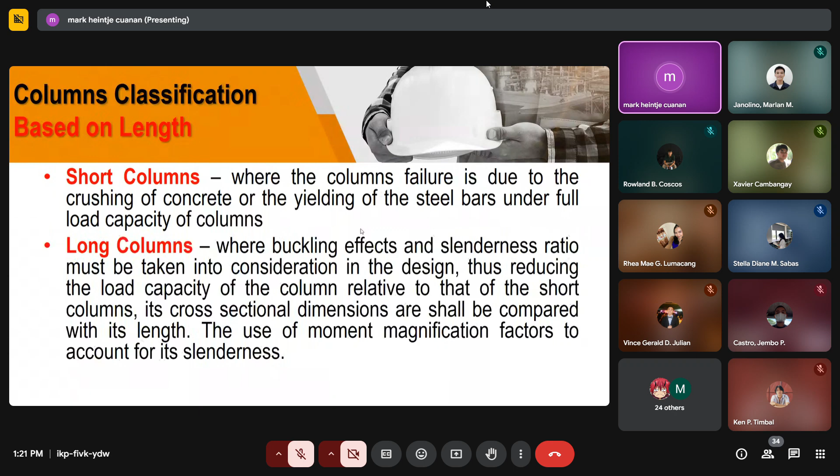We can also classify the column in terms of the load, depending on the arrangement of our axial load. When the axial load is at the center of gravity, we call it an axially loaded column. Or if it is within a specific eccentricity, but that eccentricity is very small, about 15 plus 0.03 of h, where h is the dimension of our column where the eccentricity is, then we can still call it an axially loaded column.

So in this case, if the eccentricity is very small, then we can neglect this eccentricity and only consider the actual load that the column is carrying.

And if there is a significant value of eccentricity, but the eccentricity is within a single axis only, just like this figure here, wherein EY represents the eccentricity, and E sub Y is actually greater than 15 plus 0.03 of H, since the eccentricity is only at a single axis, then we can call it an eccentrically loaded column.

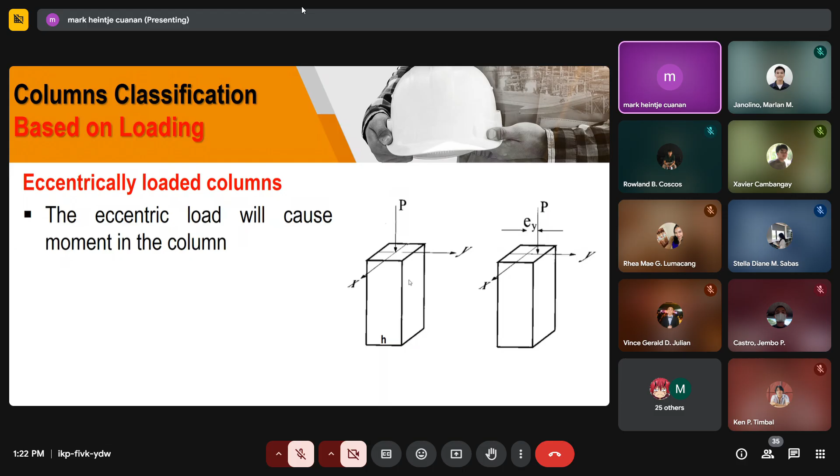And when the eccentricity is within two axes, just like this figure, if you notice the load P here is eccentric along the x and y axis, then that particular column is a biaxially loaded column.

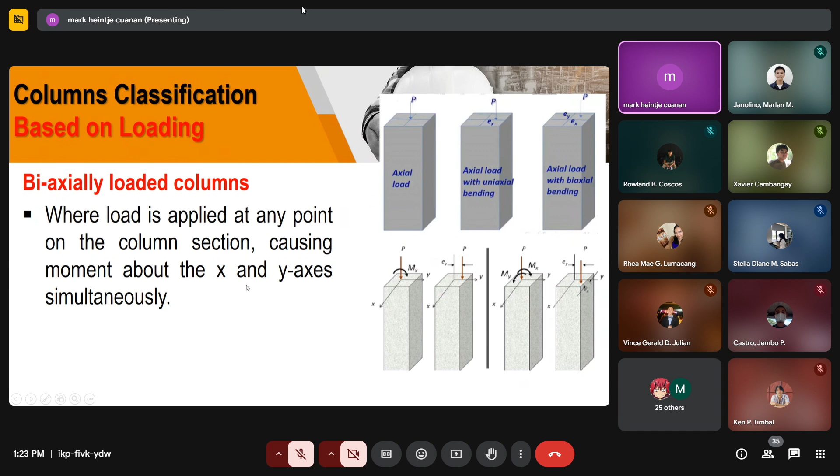We can also classify the column in terms of the frame configuration. If it is braced against side sway, meaning it is without side sway, then we can neglect the slenderness effect.

If the slenderness ratio, this value KL over R, is equal to or less than 34 minus 12 times the ratio of M1 and M2, and also less than or equal to 40, where M1 and M2 are the end moments of the column.

These are the moments that the column is actually carrying, wherein the ratio M1 over M2 becomes positive if it is in a single curvature, and negative if it is in a dual curvature.

You can say the curvature is single if the direction of the end moments are in opposite sides.

While it is negative if the direction is of the same, if the moments are of the same direction.

Take note also that in terms of the slenderness ratio KL over R, K is the effective length factor. The L here is the unsupported length of the compression member, sometimes denoted as L sub U, or unsupported length. And R here is the radius of gyration, equal to the square root of the moment of inertia I divided by the area.

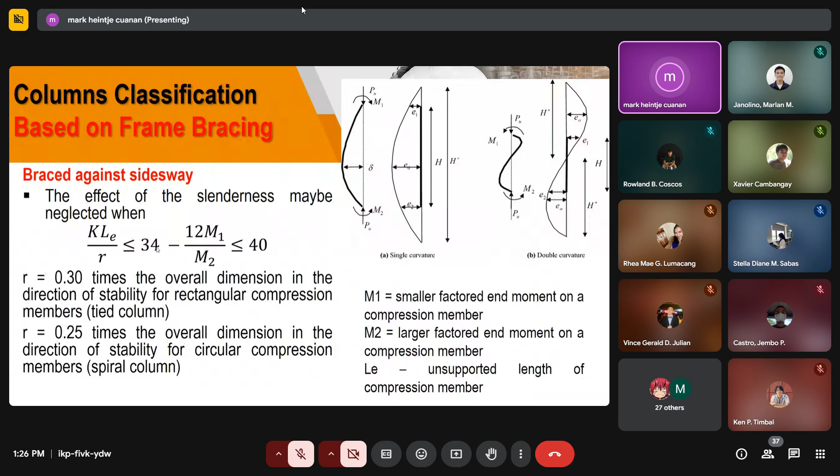Meaning it is not within this particular criteria. And when the column is not braced against side sway, this one is braced, this one is not braced. So the limit of the slenderness ratio is 22.

We also discussed the capacity of our short columns in terms of its axial compression, wherein the capacity reduction factor, P sub n, should be greater than or equal to the ultimate load. The nominal axial compression load capacity has a maximum value, P max, equal to 0.8 of P sub O when the column is a tied column, and 0.85 if it is a spiral column.

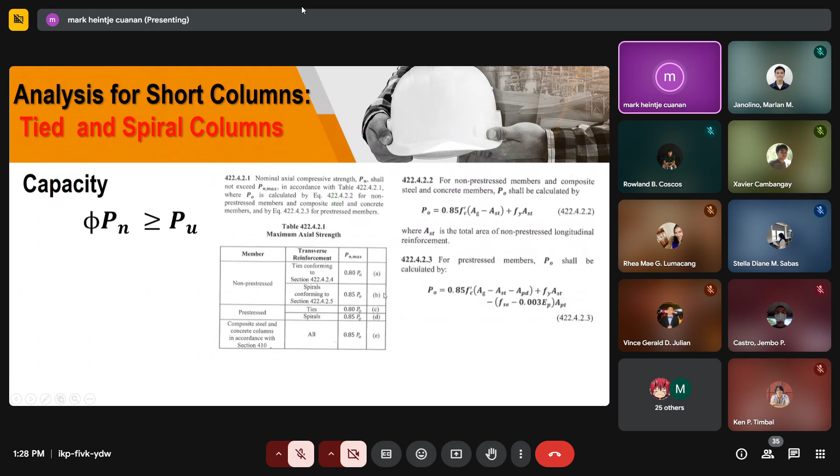P sub O is equal to 0.85 FC prime times AG minus the area of steel reinforcement, plus Fy times A sub st, where we use the cross-sectional area of the column. Unlike beams, columns don't require an effective area since all the area is effective. Substituting these parameters into our generic formula, PU becomes this expression, where the reduction factor is 0.75 for spiral columns and 0.65 for tied columns.

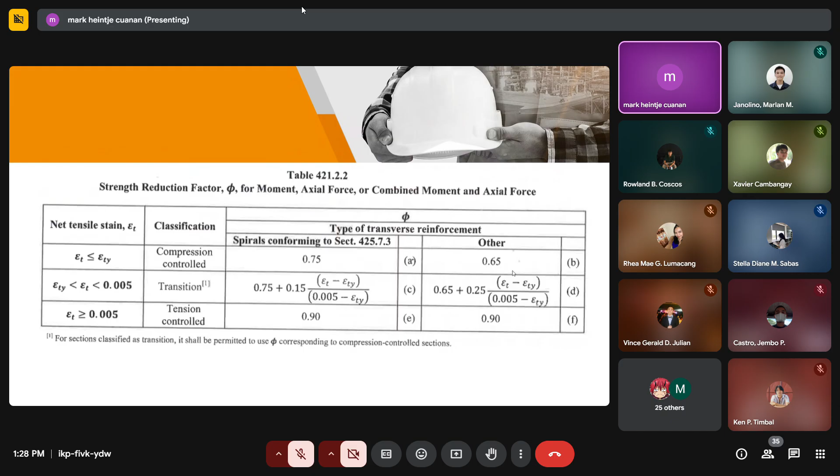For longitudinal reinforcement, the main reinforcement should have a value of 1% of the cross-sectional area, and should not be greater than 8%. If it's greater, it becomes overly reinforced; if less than 1%, it becomes under-reinforced. So it should be balanced, within 1 to 8% only.

In terms of number, if we arrange our ties in a triangular manner, we should have at least 3 main bars. If rectangular, it should be 4. And for spiral columns, it should be 6. So the minimum number of main reinforcement bars should be 6.

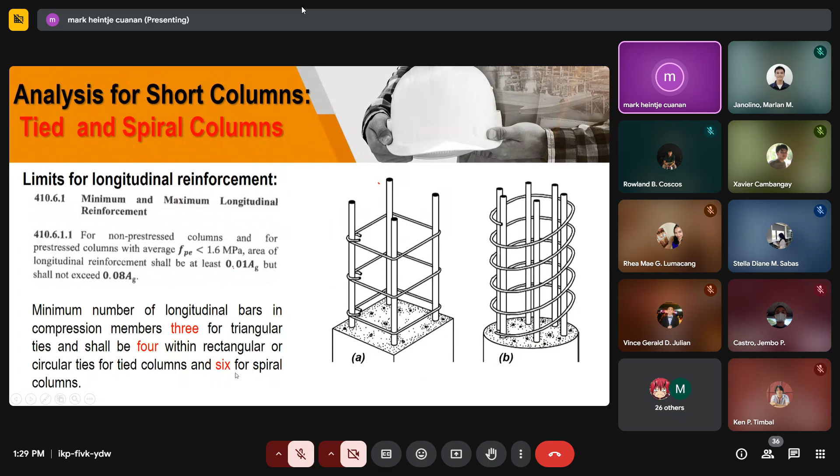For lateral ties, we have these limiting provisions. If it's a tied column, we use 10 mm ties for longitudinal bars 32 mm in diameter or smaller. If greater than 32, say 36 and above, we use 12 mm ties.

For the spacing of lateral ties, we consider the least of: 16 times the main bar diameter, 48 times the tie diameter, and the least dimension of the column. But this is based on strength requirements. After design, we still check the spacing based on seismic resistance criteria under Section 418 of NSCP 2015, which we'll discuss separately. For spiral columns, we use ties not less than 10 mm.

This becomes the minimum diameter of our lateral ties. The clear spacing should not exceed 75 mm nor be less than 25 mm.

For the steel ratio of our lateral ties, we have this shortcut formula: 0.45 times gross sectional area over core area minus 1, times f'c over Fy. The core area is the area of concrete enclosed by our stirrups, so we solve for A sub C using the diameter of the column measured from the edge of our lateral ties.

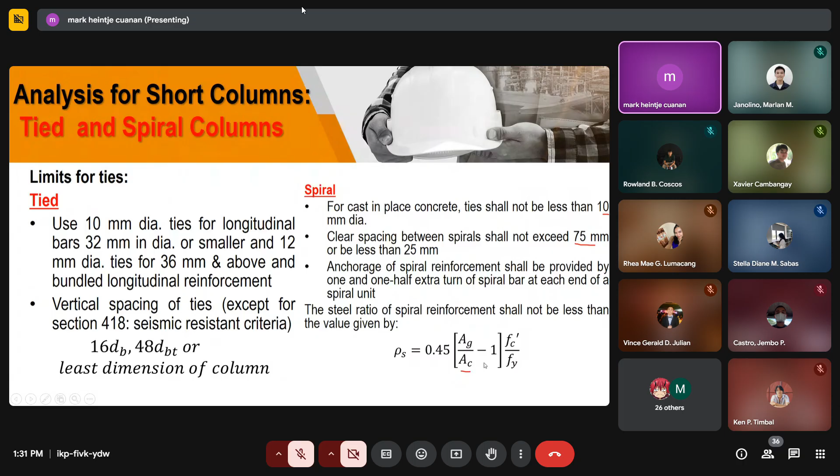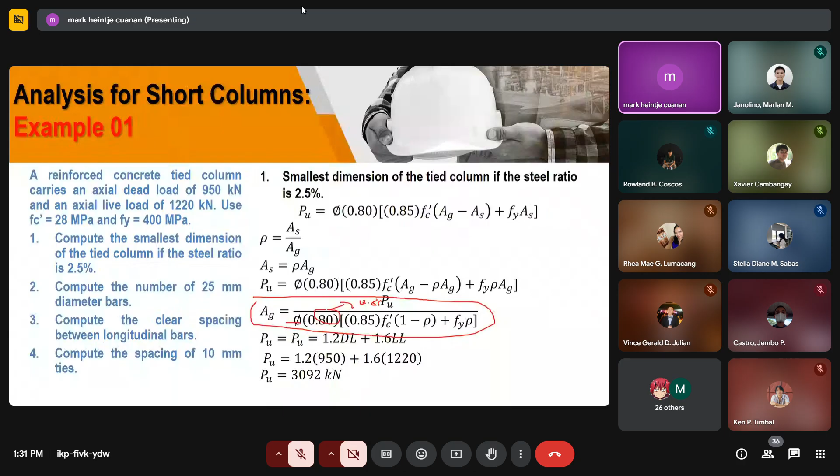We also have an example problem from last time, where the first problem gives us the shortcut formula for the gross sectional area using this expression. This expression can be used whether it's a tied or spiral column—for spiral columns, just change the value to 0.85 and use 0.75 as the reduction factor. This is also example number 2, for our spiral column.

Okay, so let's continue. So, the example problem that we presented during our last discussion on columns.

It talks about short columns. If you still remember, we are only going to consider axial load if it is a short column—meaning it is an axially loaded column. We are not going to consider the moment that the column is actually carrying. But take note, it is not always that the column is subjected only to compression load; sometimes it also has a moment.

But if that particular moment produces an eccentricity, and the eccentricity is within or less than 15 plus 0.03 of h, then we can neglect that particular moment, meaning we are just going to consider only the axial compression force.

But if the column is a long column, then it's either braced against sidesway or not braced against sidesway. In our calculations later on, the moment that the column should carry will be multiplied by the moment magnification factor if it is a slender column.

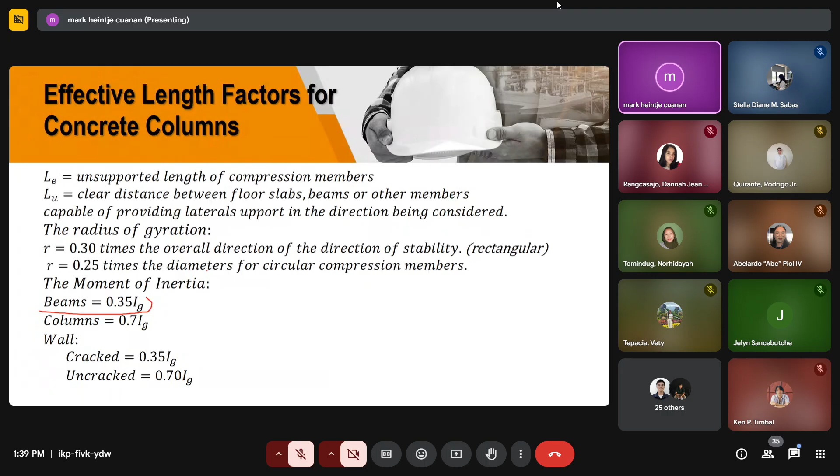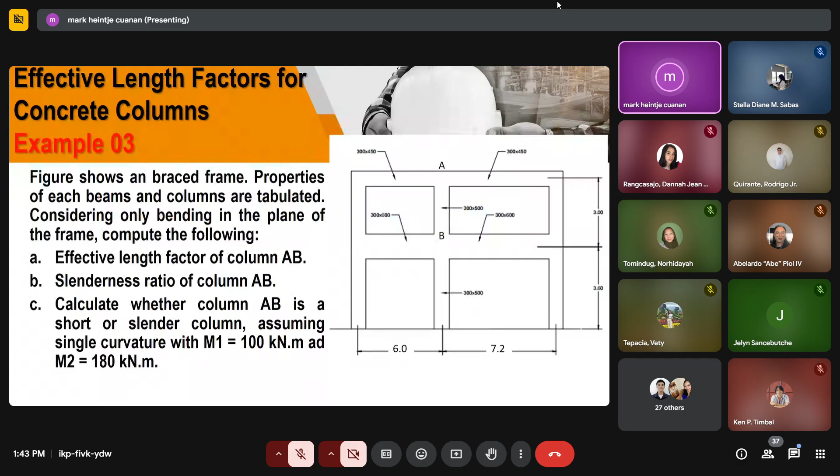So in order for us to solve for the effective length factor, let us use the Jackson-Moreland alignment chart, this chart here. To use this chart, we need to first solve for the psi.

Take note, the psi is simply equal to the summation of all the moment of inertia divided by the length of all the columns, divided by the summation of all the moment of inertia of the beams divided by the length of each beam. Take note, which columns and beams we use depends on the particular joint we are trying to analyze.

For example, if you are going to analyze this particular joint, you get the I over L for its column, where in this case there's one column, while for the beam there are two, the left and the right beam.

If you are going to analyze this particular joint instead, then in this case there are two columns, the upper and the lower, since these are connected to point B, and we also have two beams, the left and the right.

So in this case, the dimensions of all the members are already given. In that case, we can now solve for or determine the corresponding moment of inertia of all the columns and the beams.

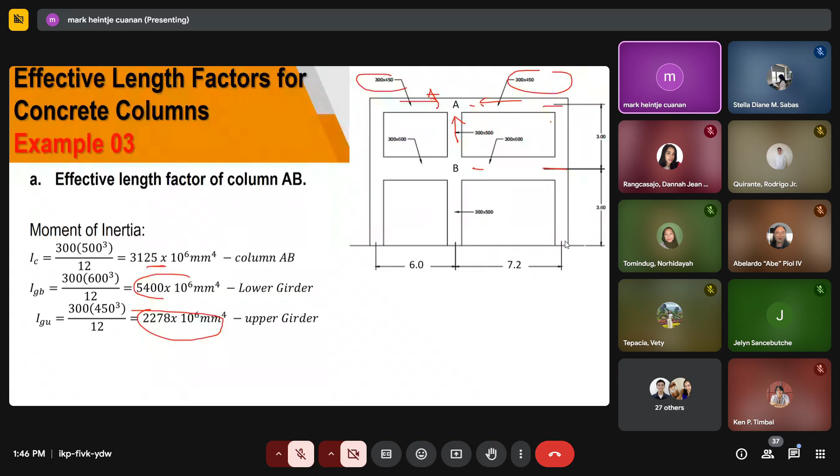And for the beams, same thing, joint to joint, using the reduced moment of inertia multiplied by 0.35 as our reduction factor, divided by the length of 6,000 and 7,200. So for this left beam and right beam, the lengths are 6 and 7.2.

Using this, we have psi A equal to 2.99. At point B, same procedure, but notice that in this case, there are two columns since joint B is connected to column AB and this particular lower column of the same dimension. So this becomes two pieces of 0.7 of I sub C all over L sub C, using the lower column and lower beam since these are connected to point B of our column arrangement. After that, we solve psi B of 2.314.

Using the psi A and B values, we plot them on our alignment chart. Psi A is 2.99, so more or less it is approximately at the level of 3.0. While B is 2.314, so between 2 and 2.5, the middle line, so 2.3 more or less.

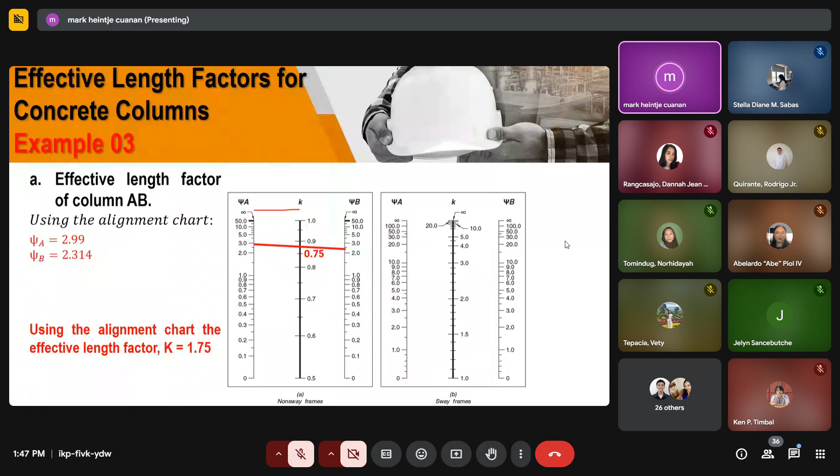So in this case, we derive a value of 0.75. No, this is not 0.75. Yeah, more or less. Let me correct our solution here.

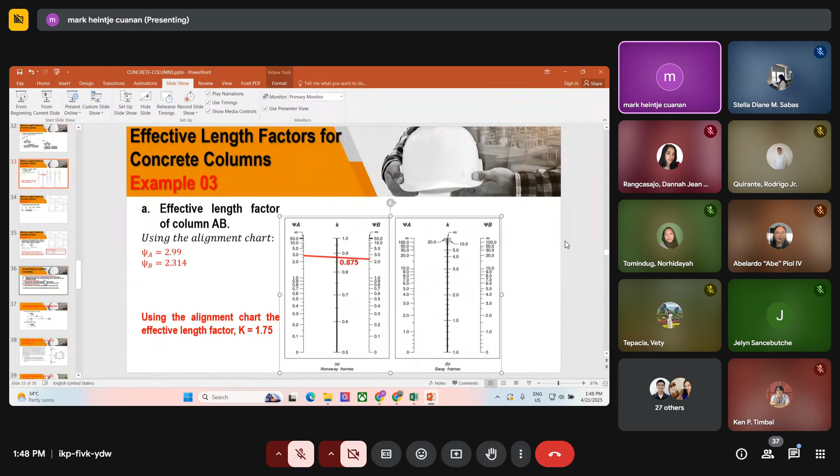So if this is 0.8, this is 0.85, this is 0.9, maybe this is 0.875. So between 0.85 and 0.9, the tendency is to place it here. This is 0.875.

0.875, so the slenderness ratio now becomes 0.875 times 2475 divided by 0.3 times 500, giving a slenderness ratio of 14.44, or 14.438.

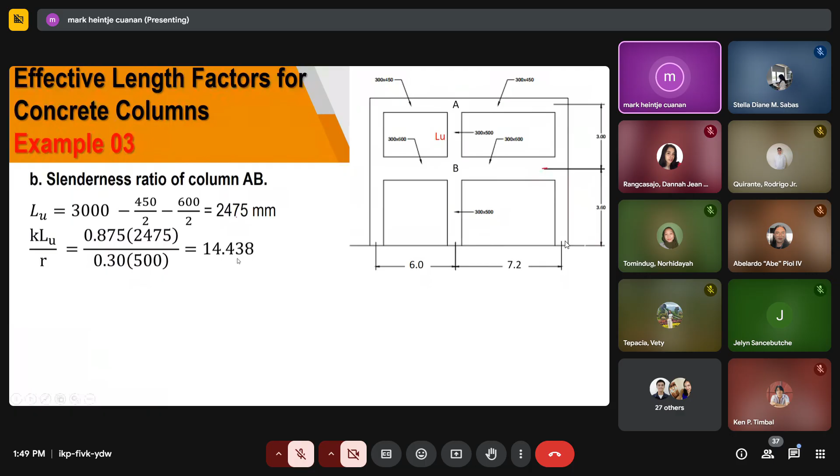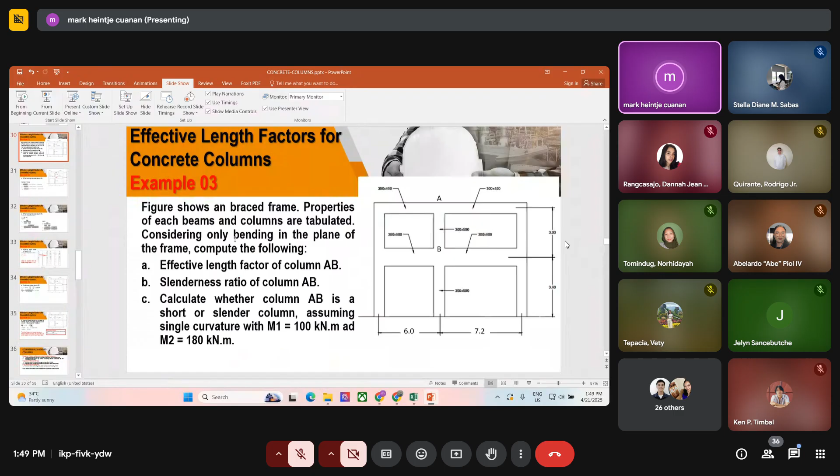Since the criteria now is for braced against or not braced against side sway, so is it braced? Yes, it is braced, meaning the criteria is this one.

You will notice that 34 minus 12 times m1 over m2, that is 27.33. The slenderness ratio KL over R is actually less than 27.33. Therefore, we don't need the moment magnification factor because the column is still a short column, not a slender column. Therefore, we are not going to consider the slenderness effect.

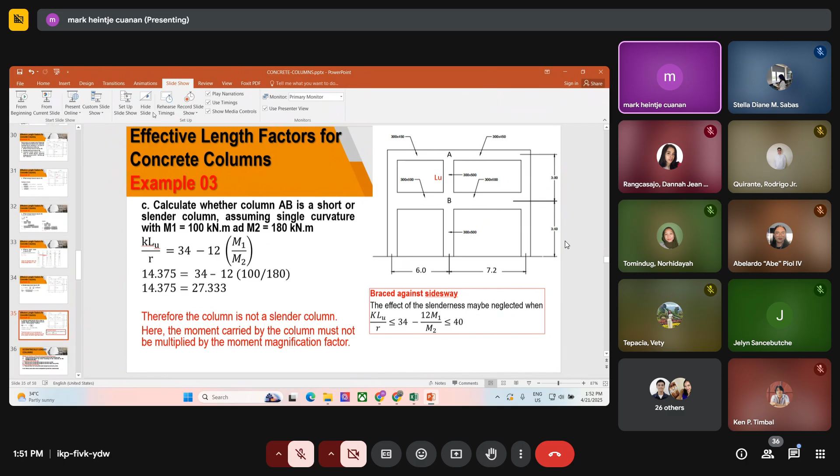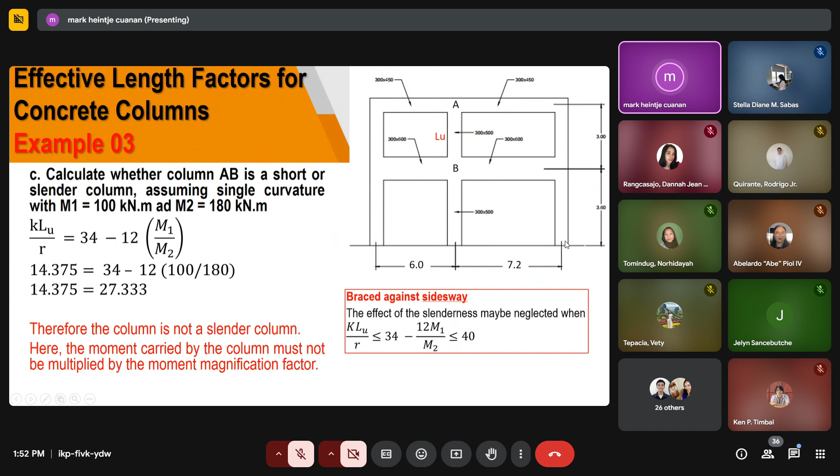We have a method wherein we can design the column by simply using the compression block analysis, but in this case we are not going to discuss that. We are going to go directly into the use of our interaction diagram.

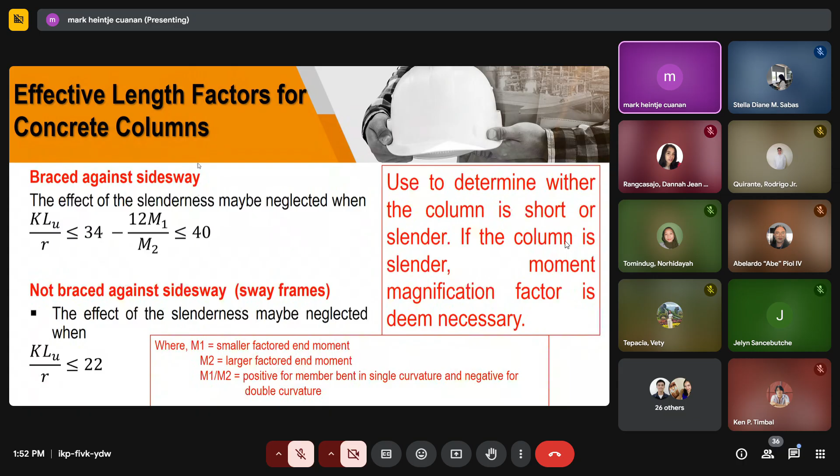Now, if it is not braced against side sway, meaning the criteria is this one, and braced against side sway. So this is braced, meaning there is no sway, and this is unbraced.

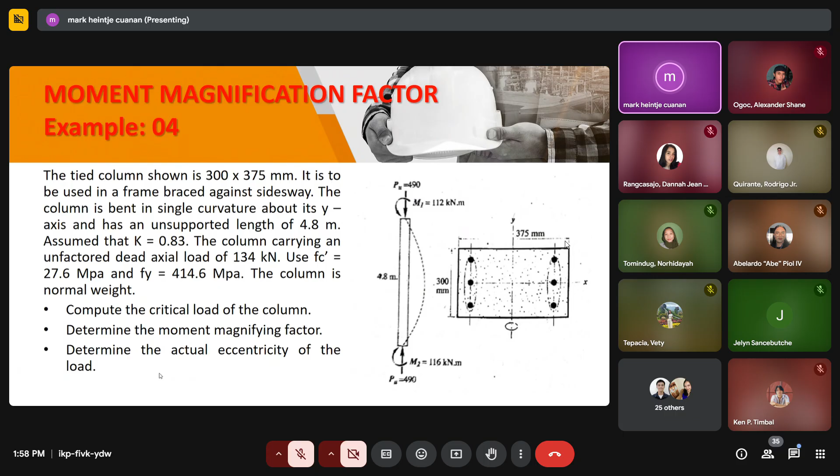For the critical load, we use P sub C, pi squared EI all over KL square, wherein for the Young's modulus of elasticity for concrete, that is derived by a value of 4,700 times the square root of Fc prime. This gives us a Young's modulus of elasticity of 24,692 megapascal. For the gross sectional moment of inertia, we have BH cube over 12, so that is 300 times 375 cube over 12, giving us a moment of inertia of 1,318.4 times 10 to the power of 6 millimeter to the 4th.

The beta DNS is equal to 1.2 of the dead load over the ultimate load that the column is carrying. In this case, P sub U is already given as 490, while the unfactored dead load is 134. So we factor out that dead load, which becomes our sustained load, and P sub U is the ultimate load. Meaning beta DNS is equal to the sustained factored load divided by the total compression load, giving us a beta DNS of 0.328.

So the flexural rigidity that we are going to use here, using the formula 0.4 of EI all over 1 plus beta DNS, gives us an EI of 9,805.4 times 10 to the power of 9.

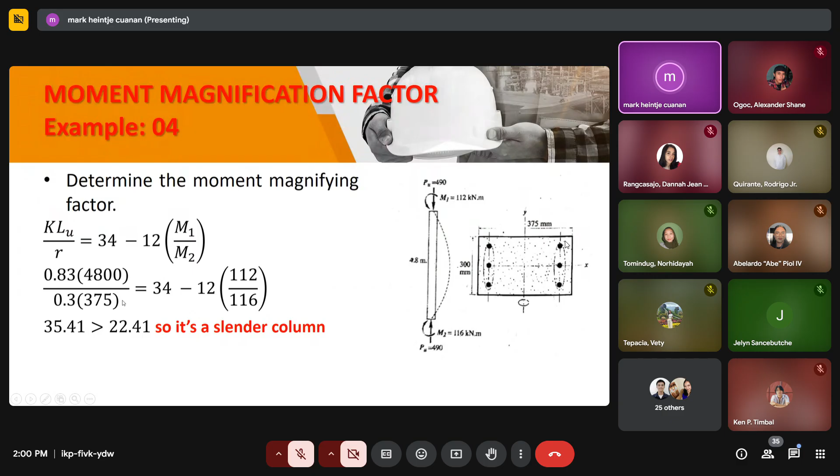So meaning, if it is greater than 22, then it is a slender column, then we need to solve for our moment magnification factor. In this case, we have C sub m equal to 0.6 plus 0.4 M1 over M2, and that gives us a value of 0.9862, and use that to solve or to evaluate our moment magnification factor.

So that is C sub m is 0.986. So moment magnification factor now becomes Cm all over 1 minus Pu divided by 0.75 Pc. So that will give us a moment magnification factor of 1.1.

So since it is braced against sideway, all you have to do is multiply the maximum moment by the moment magnification factor. That becomes 1.1 times 116. We have two moments here, 112 and 116. 116 is bigger, so that is the one we use for the moment magnification factor.

So instead of designing it using the actual load of 116, we are going to design it based on a critical load of 127.6. Because the excess accounts for the slenderness effect.

So in that case, since we already know that moment is simply equal to the concentrated load times the eccentricity, then therefore eccentricity is simply moment divided by the actual load. It will give us a value of 260 millimeters.

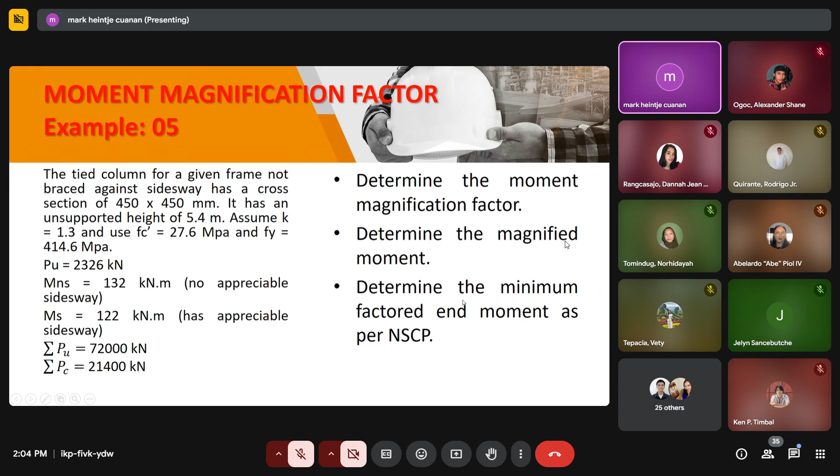So simple for this, that's question number 3. Since we already have our P sub U, we multiply it by the minimum eccentricity requirement.

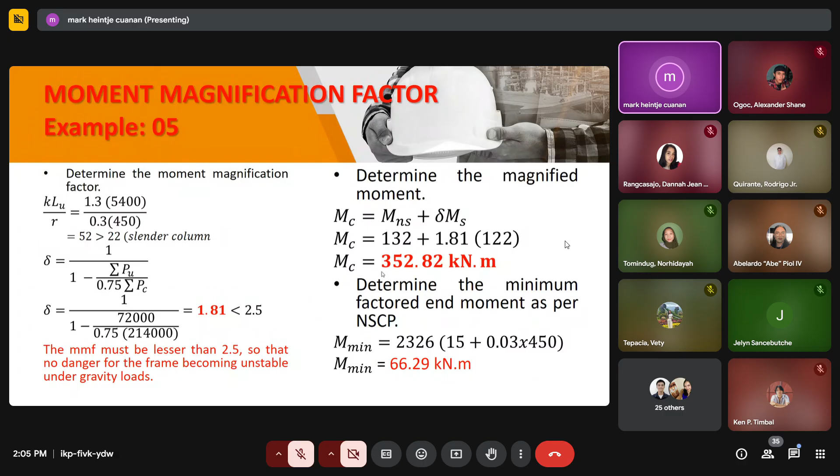So first we check if we actually need the moment magnification factor by simply solving the slenderness ratio, and that is 1.3 times unsupported length of 5.4 divided by 0.3 of H. H is 450. So the slenderness ratio is 52, that is greater than 22. Therefore, we need the moment magnification factor.

So in this case, the moment magnification factor is 1 over 1 minus the summation of PU divided by 0.75 summation of P sub C. So it will give us a value of 1.81, which is less than 2.5.

So take note, for frames not braced against side sway, the moment magnification factor that we derive should not be greater than 2.5. Because if it is greater than 2.5, then there is actually a danger for the frame to become unstable.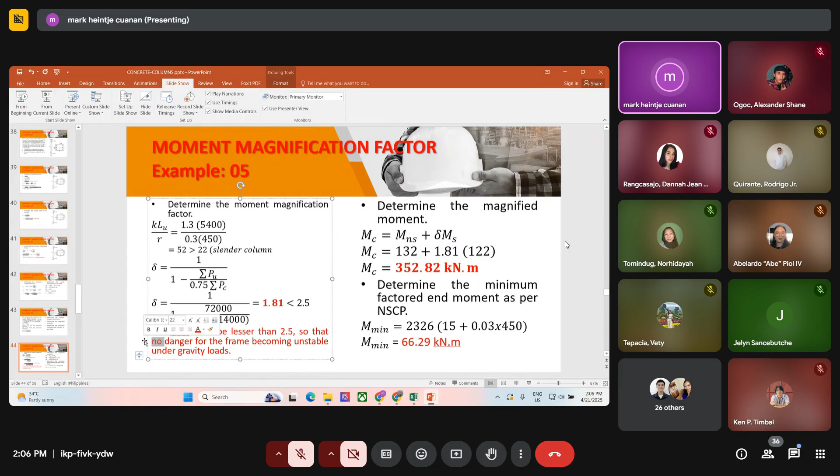So it means you should not exceed the value of 2.5, because that becomes your limiting value. For example, if you solve this and the moment magnification factor reaches more than 2.5, that means you don't need to continue the design. In other words, you need to increase the dimension or add a column. It's not allowed. It is not within the criteria for design moment. You need to reduce the moment by simply increasing your dimension or adding more columns to the framing system.

Okay, so in this case, we have a moment magnification factor of 1.81. Then we apply this to solve for our critical moment, wherein the critical moment is simply Mns, moment without an appreciable side sway, plus the magnification factor times the moment with appreciable side sway. That will give us a value of 352.82 kilonewton meters.

And on the other hand, for the minimum factored moment as per the code, we simply multiply our ultimate load with the minimum eccentricity of 15 plus 0.03 times 450, which gives us a value of 66.29. So that's the moment that this column can carry, to be called an axially loaded column. But if you notice, it goes beyond this minimum value of 66.29.

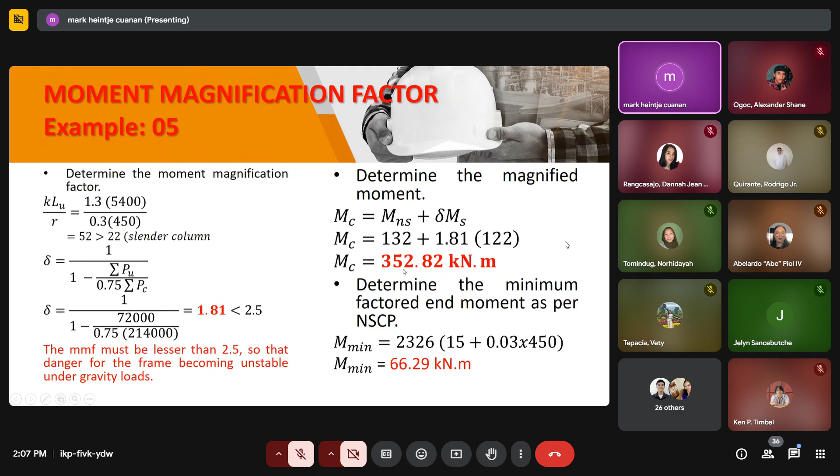But take note, each column has its own unique interaction diagram, because the interaction diagram actually depends on the shape, the number of reinforcements, the compression strength of the concrete used in the design, and the yield strength of our steel reinforcement. So you should match this when you design. And of course, also the ratio, the lambda.

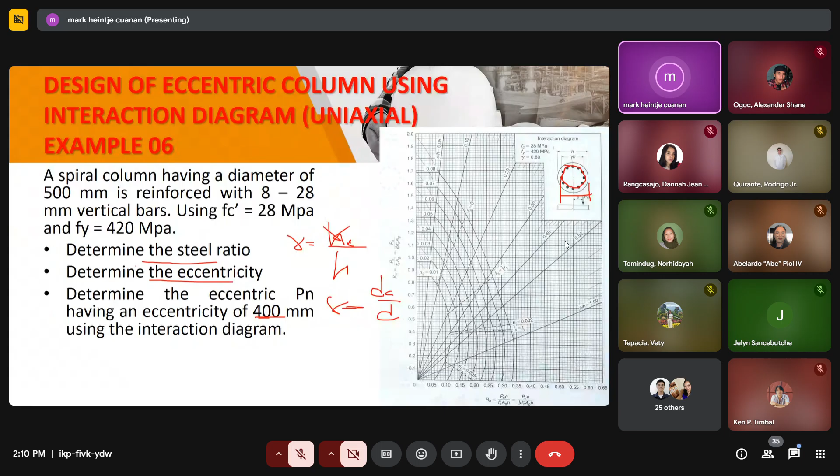Okay, and then to solve for the Pn, we need to use the interaction diagram. So first, we solve for the ratio of the eccentricity divided by the dimension. In this case, given the eccentricity of 400, the overall dimension of the column is 500. So that is 400 divided by 500, which gives us a value of 0.8.

This 0.8 becomes the basis for the first line that we plot on the interaction diagram, wherein it is characterized by this particular line. This is what I'm getting, I just connected the e/h of 0.8 to the center line.

So if you notice, these diagonal lines represent the value of e/h. So in this case, the h is the diameter.

This is the E over D ratio. And the diagonal has a corresponding numerical value: 0.05, 0.1, 0.2, 0.3, 0.4, 0.5, 0.6, 0.7, and the next one is 0.8. So this is the 0.8 line. Connect a diagonal line from 0.8 to the center line, then use the steel ratio to draw your interaction curve.

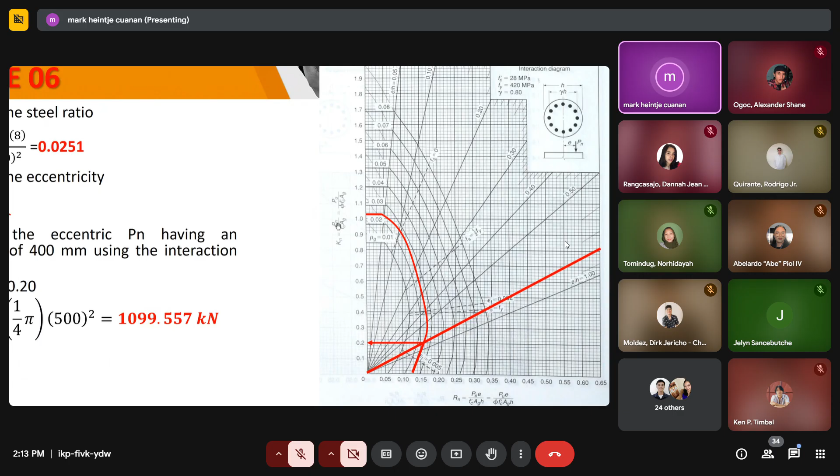In this case, we got K sub n equal to 0.2. That's projected here, giving us 0.2. From that 0.2, we substitute it, since our K sub n is simply equal to Pn divided by Fc prime Ag. So if I multiply Fc prime Ag by K sub n, that will give us the value of the nominal axial load capacity.

So in that case, 0.2 times 28 which is Fc prime, and then the gross sectional area of the column, gives us the ultimate nominal load of 1,099.557. Alright, so any question or clarification with regards to this particular example problem?

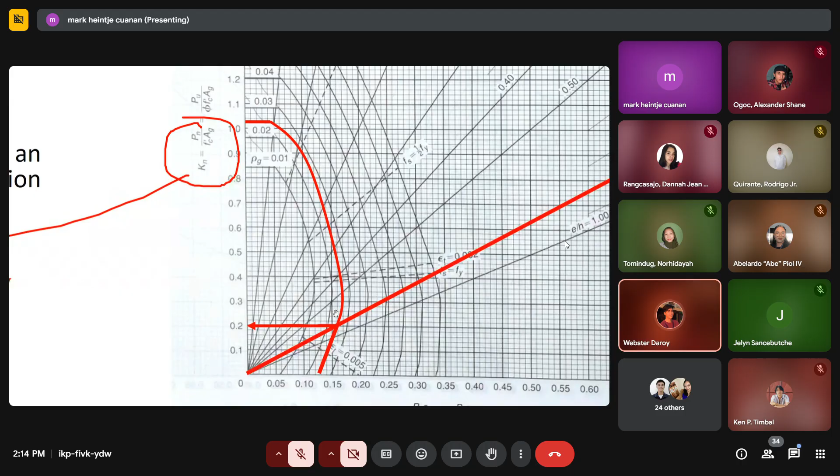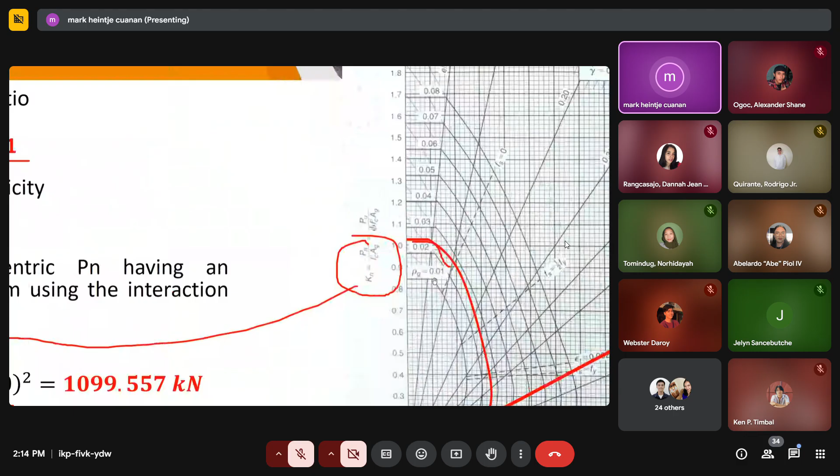Okay, so this one is actually based on the steel ratio. So if steel ratio is 0.01, this is 0.02 — this curve here. Let me draw here. This curve, this is the 0.02 steel ratio. Let me use another color. This is the 0.02 steel ratio.

This curve here is the one I traced. But since the steel ratio is only 0.0251, and this is 0.02, and this is 0.03, my curve should fall in between. That is why we are going to trace a particular curve in between 0.02 and 0.03, considering that the steel ratio is 0.0251. So you trace a curve like this.

Again, this is not a perfect curve since I am using PowerPoint to draw, which is a bit difficult to use. But what I'm trying to say is we are going to trace a curve similar to the configuration of the original curve here, and wherever our curve intersects with the diagonal line, that is the point we use — intersect it and draw a horizontal line so that we can get the value of our K_n.

So the intersection of the interaction curve and our diagonal line — wherever it intersects, we project that to our K_n, so that we get K_n equal to 0.2. That is why in this case, our K_n is actually equal to 0.2.

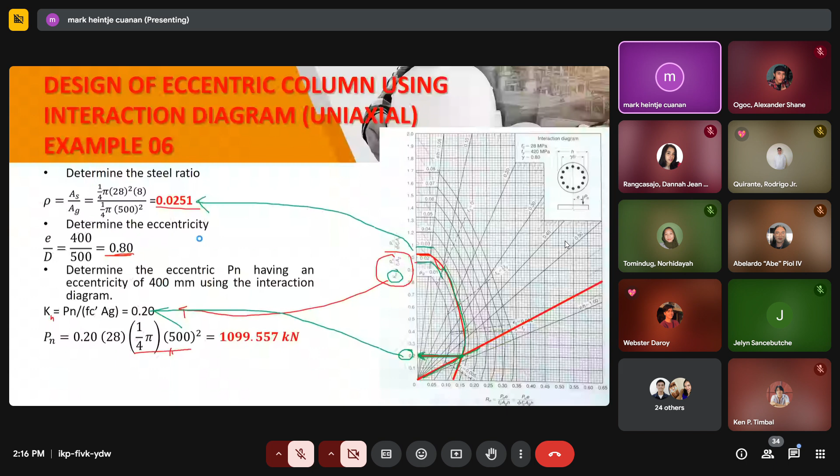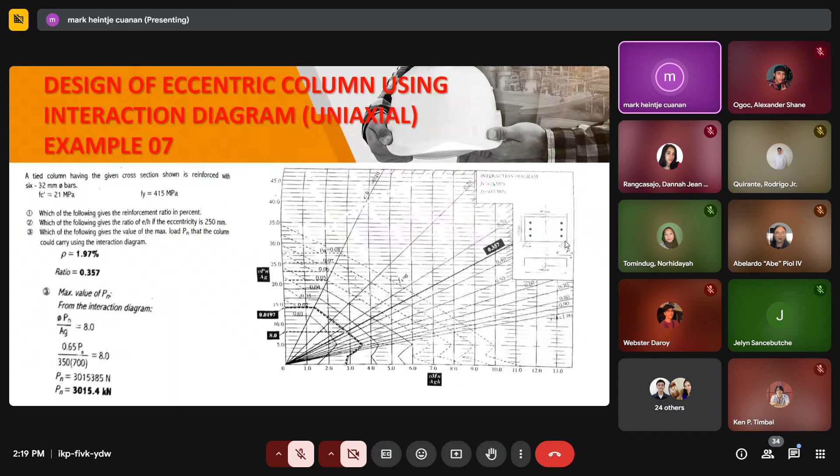So, using the interaction diagram. So if you notice here, ang atong steel ratio is 0.0197, ang atong ratio is 0.357. So if you notice in the interaction diagram, kindly download this para maklaro ninyo.

Okay, so if you notice in our interaction diagram, the first diagonal is 0.1. The second, 0.2. This is 0.3. The next is 0.4. So meaning, kung 0.4 na, kani 0.3, ang gagmay nga line is 1,2,3,4,5,6,7,8,9,10. 10 ka guhit, so kada guhit, 0.1, diba, or 0.01. So this is 0.31, yung first nga gamay nga line, 0.31, this is 0.32, 0.33, 0.34, 0.35, this is 0.36. So 357 man siya, so tunga diri rapid.

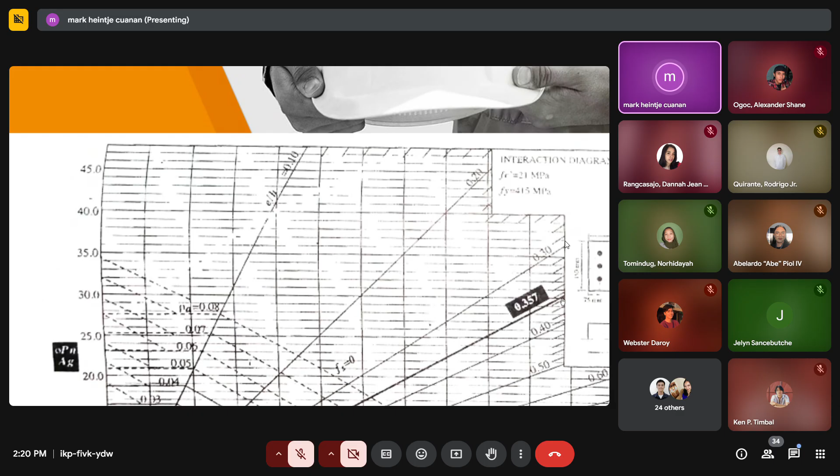Okay, and you project that diagonal going to the center. Project ka na kaning diagonal line. And after that, using the steel ratio of 0.0197, buhaton nato og interaction curve. So this is 0.01, this is 0.02, ang atong steel ratio is 0.0197, so more or less na diri. So mao din nga interaction curve.

Ayan, so imo lang sunon kung giunsa na siya, ano na siya. So ang intersection karon, that intersection, you project it going to the left, then it is pointing the 8. No, anong 8 man? So this is 5, this is 10, ang mga gagmay ani, 1,2,3,4,5, so meaning tag-isa, so 5,6,7,8. So this is 8.

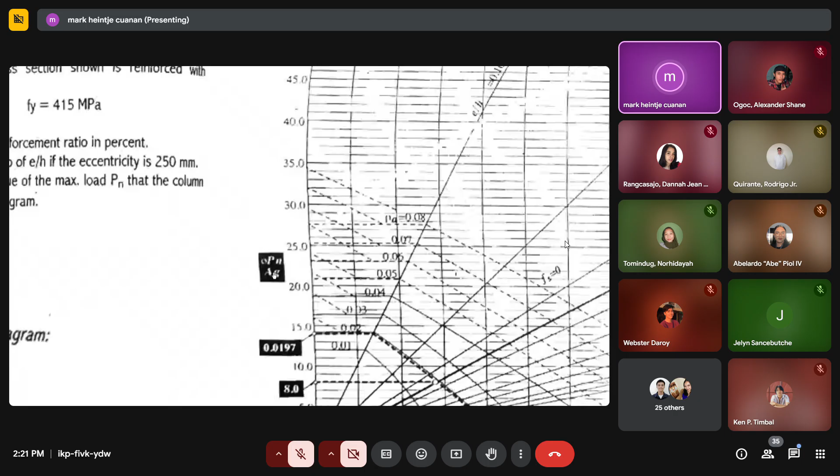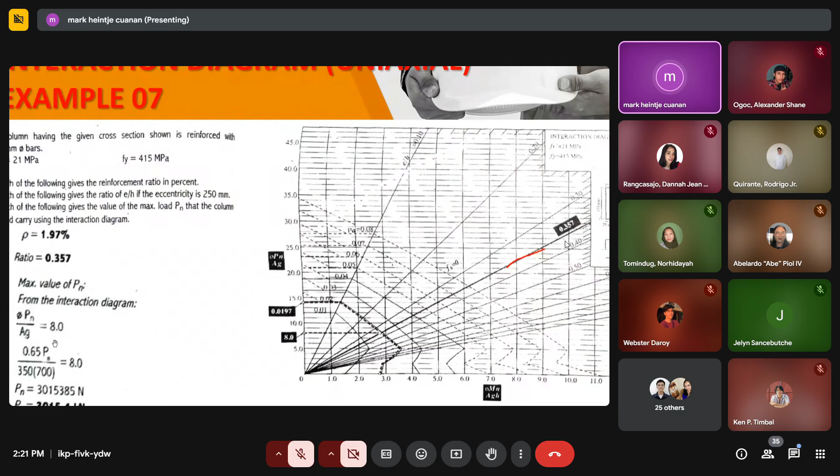So your Kn, which is equal to, ito, yung, if you notice, ang Kn na to diri is reduction factor Pn over f'c Ag, diba, based on this table. So therefore that value is simply equal to 8. So reduction factor, in this case this is a tied column, 0.65. Pn divided by gross sectional area, 350 times 700, we will have Pn of 3,015.4 kilonewton. Okay, this would be the nominal axial load capacity of our column.

Right? So, any questions so far? Do you have questions, clarification? Question, gets na? Okay.

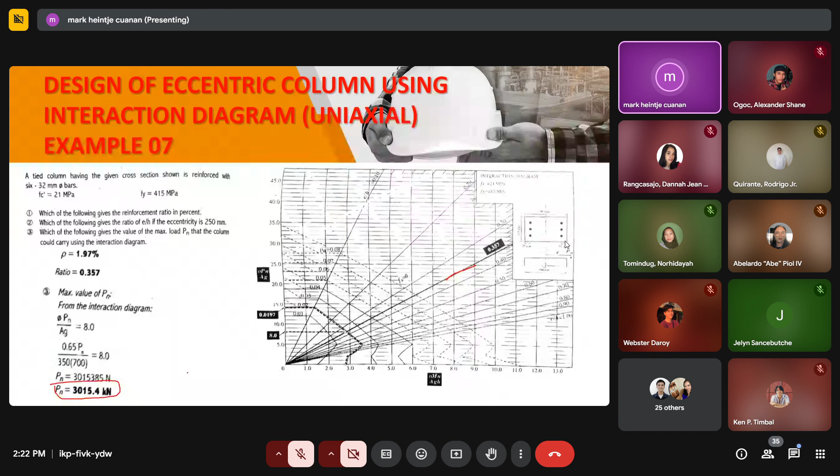Okay, so now if it is a biaxial column, naatay duha ka method on how to determine the capacity. Okay, the first method is the load contour method, wherein for the load contour method we are just going to get the capacity ratio. Wherein the capacity ratio, in order for us to say that a column is safe, should be less than 1.0. Okay, it should be less than 1.0. Then the capacity ratio is simply the ratio of our moments.

Okay, moment na siya tanan diha. Mnx over Mnxo, Mny over Mnyo. Unsa may kalainan anang duha? Kung may gay kag Mnx, itong mga Mnx na to, these are the moment derived from the interaction diagram. Okay, and so let me check, no?

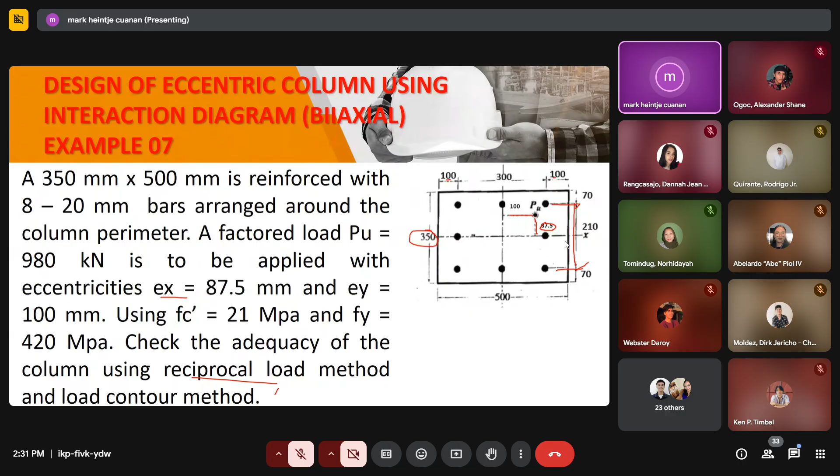Alright? So from that, natay PN nga 1735.063. Wherein in this case, ang atuang column is only carrying a factored load nga 980, di ba? 980 yung gi-carry. Unya, kung ato ning i-multiply og 0.75 ni atong PN, this is more than the 980. So pila man ni siya, kumbaga. Asa naman ito kung kalkyo.

1735.063 times 0.75 na reduction factor, that will be equivalent to PU of 1,301.297. Therefore, the column is still safe, no? Using the reciprocal load method, no? Okay.

All right. So now the other method, no, the load contour method. So for the load contour method, instead of projecting the interaction diagram going to the right, this time going down ta kay moment na tong kwaon. Ito man natong kwaon, yung PN times eccentricity. So MNOY, so pag project na to diha, that is equal to 0.14.

0.14 tungod kay kada guhit, that is simply 0.01. So 0.11, 0.12, 0.13, 0.14. Ito yun. And using this formula, this is our MNOY kay kung siya, load times eccentricity moment. So mao ni, no? So natay moment nga 180.075. So you just substitute no, the values na siya na values diya. So y ta is 350.

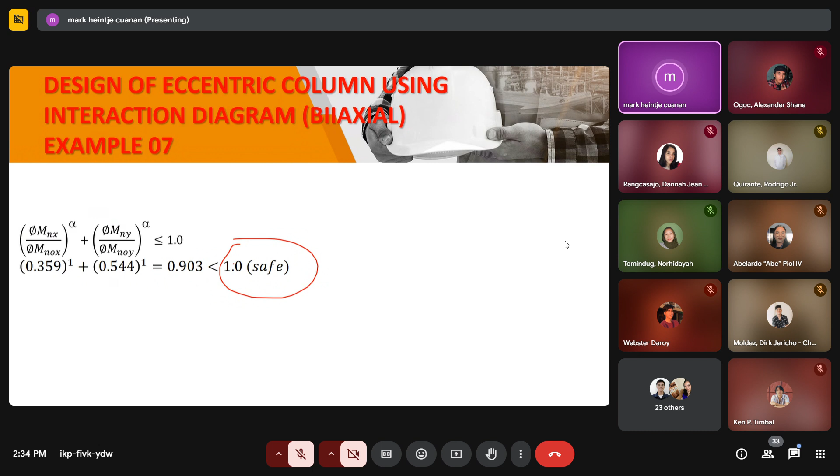Alright? Okay, so there are some problems, no, in relation to this topic. You may use this link, no, nani dito sa ato ang Google Classroom. You may open it, no, for some more or example problems. Okay, so any other questions, clarification?

Nagits na ba ning itong problem diri? Medyo sayon na siya actually, no, kay daan na magka-interaction diagram, no. So what they're going to do is, I will provide the interaction diagram, but you need to print this particular figure for the solution for your alpha, no. Ani, dala mo ani next time, no. Pag-quiz na to. Plus katong ato ang

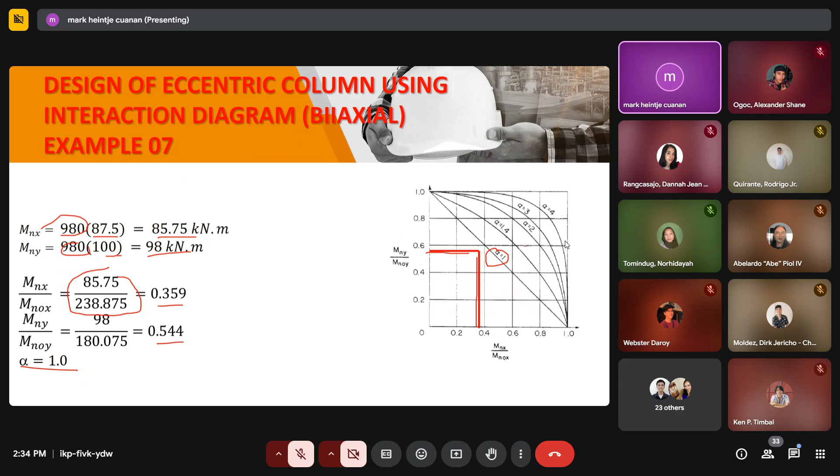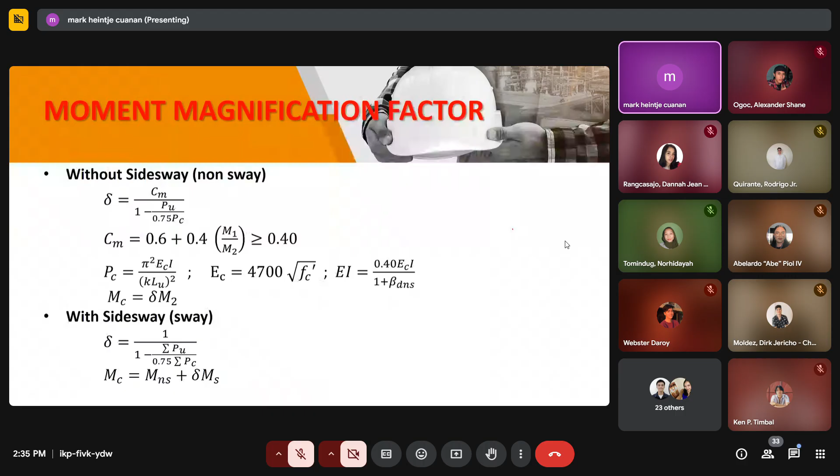Atong alignment chart, no, kanisiya, no, para sa atong effective length factor. Okay? Okay, for our quiz, short quiz lang siguro ta, dili na sa nato tiwason, no. Mag-focus lang ta sa short column lang sa siguro plus a little bit of eccentric, no. Uniaxial lang sa, dili sa ta mag-biaxial. And then by next meeting, I am going to discuss how to make the interaction diagram.

Okay? Sa inyo habiyang plate kay gamit yung interaction diagram, pero mag-derive sa inyo ang kagalingon ng interaction diagram. Diba? So that is why I'm going to teach you how to make, no, this particular diagram. Okay, that will be next week. Okay, so any question, clarification so far?